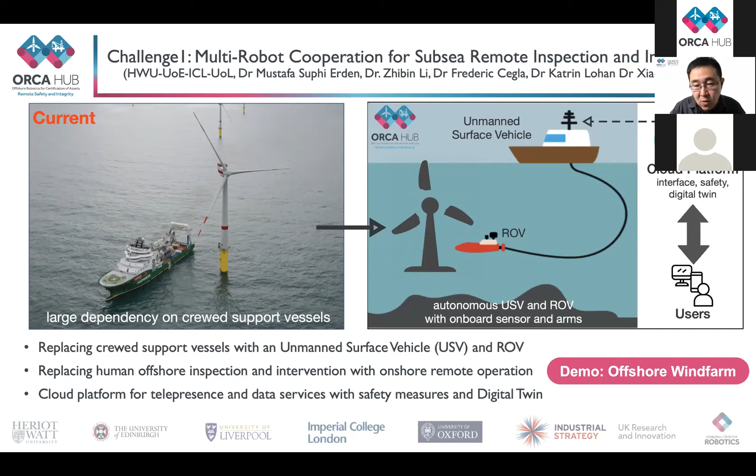So this is the joint challenge with Heriot-Watt University, University of Edinburgh, Imperial College London, and University of Liverpool, with all my colleagues here, working together to push this forward. So eventually, we really want to demonstrate this challenge in the offshore wind farm as a use case.

So we identified 4 main technologies we think are really important, as the pillars to eventually support this Challenge 1. So the first one is the coordination of the unmanned surface vessel and ROV.

So I think I want to quickly review what we can achieve now. Some of you are probably quite familiar if you joined the 17th information session, but let's just quickly understand what we can do and what we are missing.

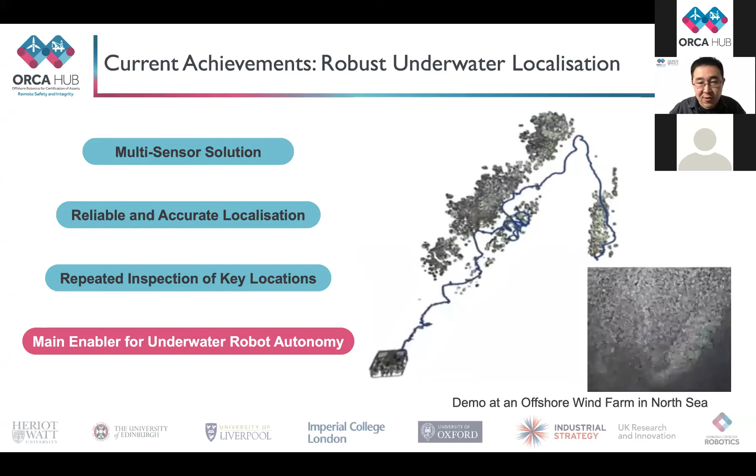So what we can do now is we can quite reliably localize our robots or underwater vehicle using different sensor fusion solutions. And based on that, we can repeatedly ask the ROV to go back to the key locations to do the inspection.

So based on the localization and this planning capability, we can have a design trajectory. If we know roughly what the environment looks like, we can ask the vehicle to follow and autonomously navigate around while doing all the inspection or other operation work.

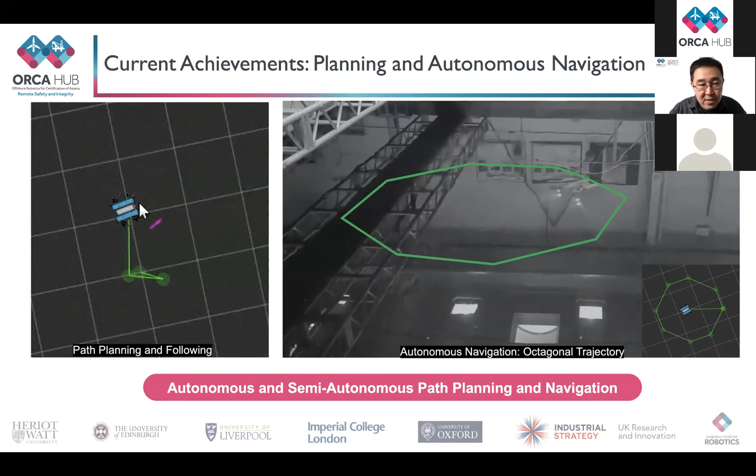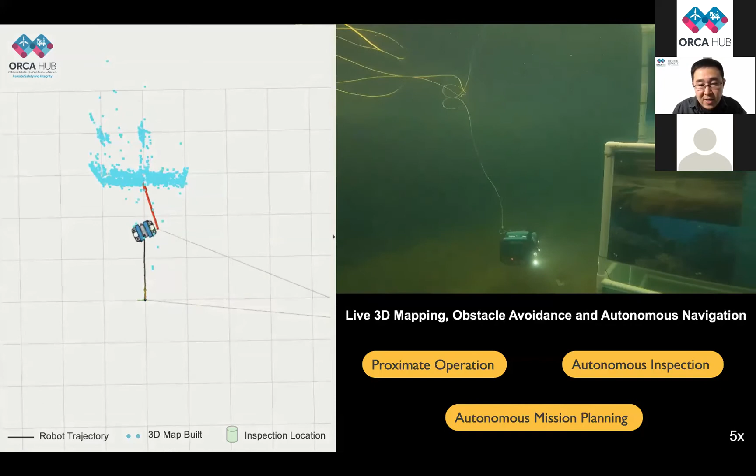So this is one of the videos showing work quite related to all this localization, planning, and autonomous navigation for autonomous underwater inspection, especially for relatively close range inspection.

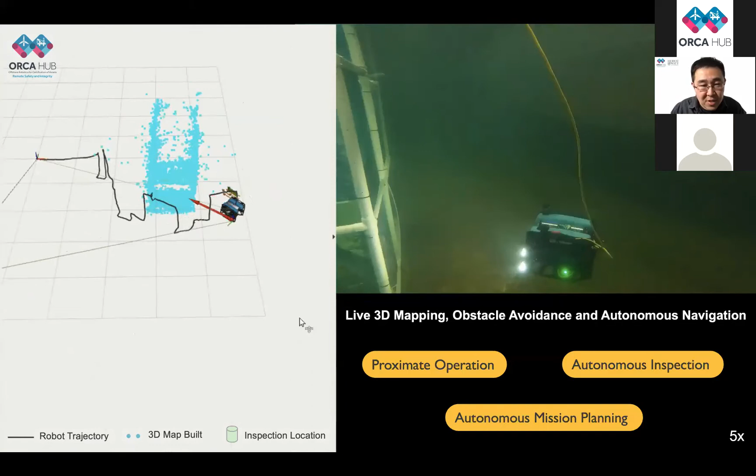So we have the vehicle dropped in the water, the vehicle autonomously searching for the target, and using all the onboard sensors to build a map, meanwhile avoiding all obstacles, and also doing the inspection in terms of collecting high resolution images and building a 3D map of the environment.

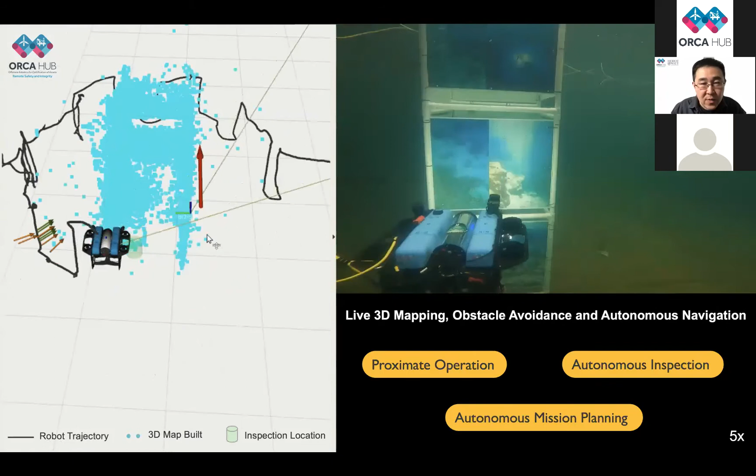So once finished with all this autonomous operation, we come back, we have high resolution data, and we can build a much denser map. This is the robot going and searching the path with the pattern, eventually finishing.

So this is a quick summary of what we can do now. But what's really missing, and what this challenge is going to really look at for the next step.

So the very important one is really cooperative localization and mapping of the USV and ROV, because when they're working together, they need to have a kind of pattern to support each other, with the tether of the ROV connected to the USV, because everything we want to do is pretty much pushing toward autonomous operation.

We also need to really look at real-time obstacle avoidance and planning with the surface vessel working close to the wind turbine in our use case. So we want both the ROV and the USV to have real-time avoidance and planning capabilities.

So the multi-robot collaborative navigation and planning is definitely the main thing to eventually support all the autonomous offshore operation. That's why it's a very big thing.

And the 3D exploration path generation, generating the path when we're doing this inspection, because it's going to be quite a challenging environment when these two come together with the tether management and all the things. We're starting to do this simulation now for this scope, based on our existing capability I showed before.

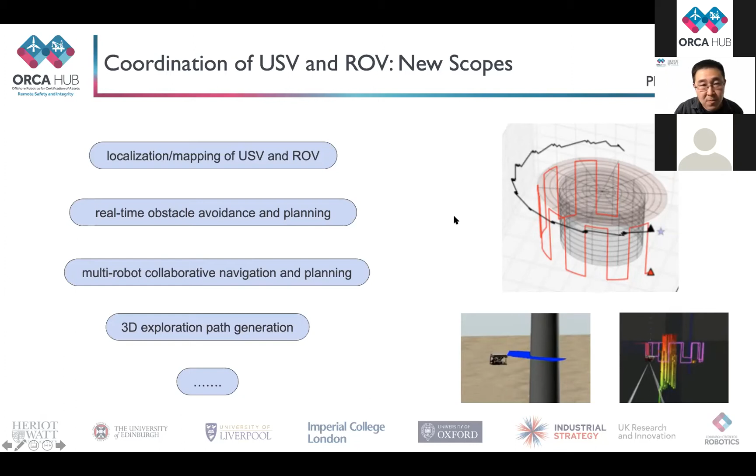So the next quite important technology we think is around one of the use cases, underwater inspection, which we really want to do. So I'm showing some of the current achievements we can do.

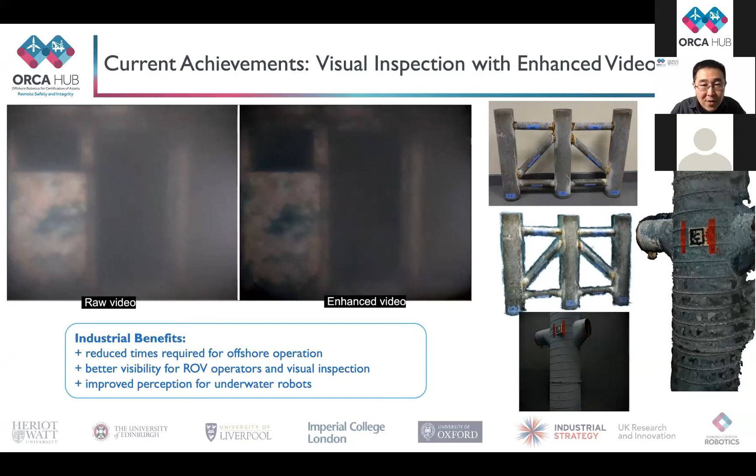So we can use a camera to extract and collect very high resolution images with improved visibility. I'll show you an example on the top left, a video. As an example, we collect data offshore, and you can see much more improved resolution.

This is very interesting for us because this can reduce the time for offshore operation and also improve the visibility for operators. Meanwhile, that means the robot has much more data to see what's around it and also to do mapping and situational awareness.

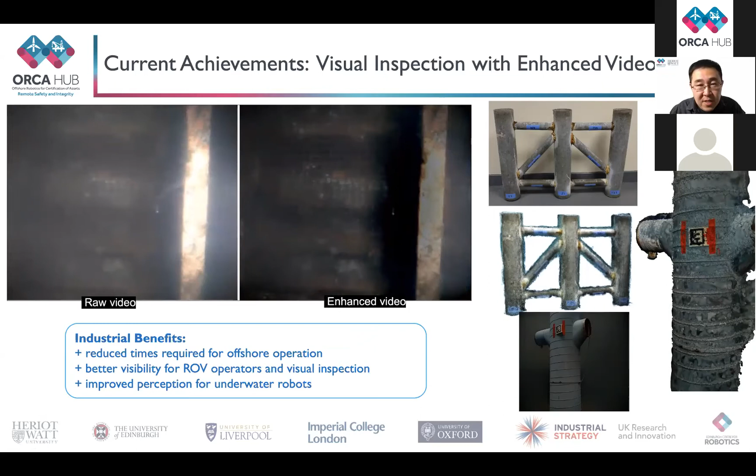So after this, we can really use the current technology to build a dense map of the environment to do the inspection. This is very much based on visual inspection, but for us, the new scope in this challenge and technology around it is still one part: contactless inspection.

So basically using vision, collecting all the videos, high resolution videos, really for the operators, for humans, and also for the machine learning algorithms to understand what's happening for the assets.

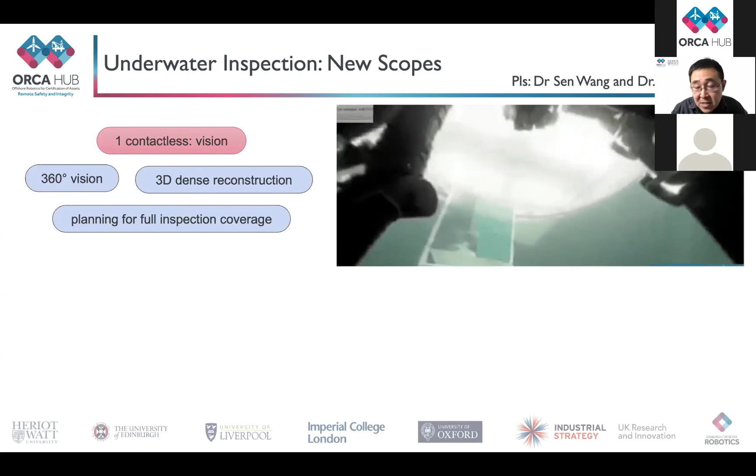A very important thing we explored and are starting to do is using 3D vision and omnidirectional vision. I'll show you a video on the top right. You can see on the vehicle we have a full 360 vision, which gives us a much better wide view of the image. This means when the operator sees the video, or when we're using this to train machine learning or deep learning algorithms, we can have much more data.

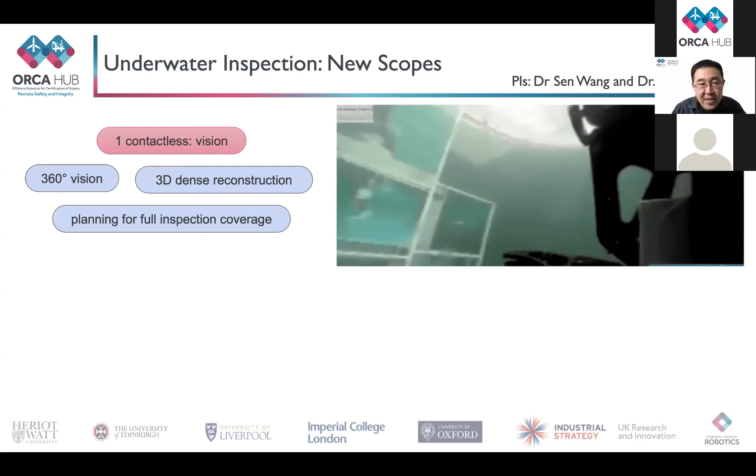So we can still continue doing the 3D inspection, right? We can build a 3D dense map and measure the dimensions. One of the very important parts here for the underwater inspection is really doing a planning algorithm to ensure full inspection coverage, which means once we go for one job, we really want to cover everywhere we're interested in.

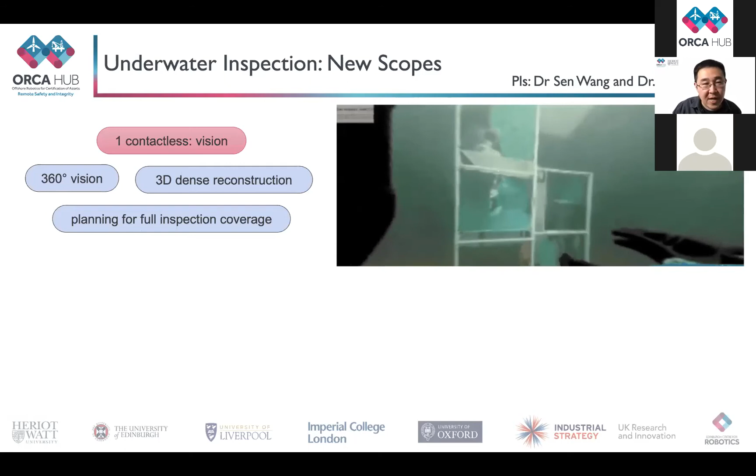We want to do inspection, but this is going to be autonomous systems, and we need to have a full understanding of where we covered and where we haven't covered for the underwater inspection. This is going to be planning algorithms coupled with the previous ones I showed.

The next part is more like contact inspection, especially doing non-destructive testing. We have a collaboration work, and Fred from Imperial is leading the work to design and manufacture this marinized EMAT sensor.

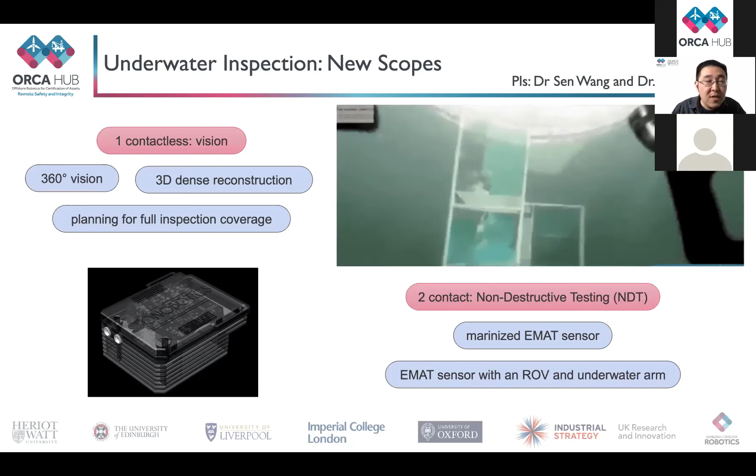Electromagnetic acoustic transducer sensor. We can use these sensors, eventually deploy and test our ROV and underwater arm, using this for NDE inspection. So these are the two new scopes we really want to focus on in underwater inspection technologies.

The next one is more focused on underwater intervention. Currently, what we can do is use our system to stabilize the interaction with a physical structure, especially when we're facing disturbance, for example random current, so we can stabilize our vehicle and use the robot arm to make contact with the asset.

We can also optimize the vehicle location for maximum manipulability and force transmission. We had a demonstration back in Blyth for the ORCA project.

We had a vehicle dropped in the big tank, and we could send the vehicle's position and pose through 4G. Then we had a robotic arm and a Stewart platform in our lab in Edinburgh to simulate this motion and do the inspection for the pipe.

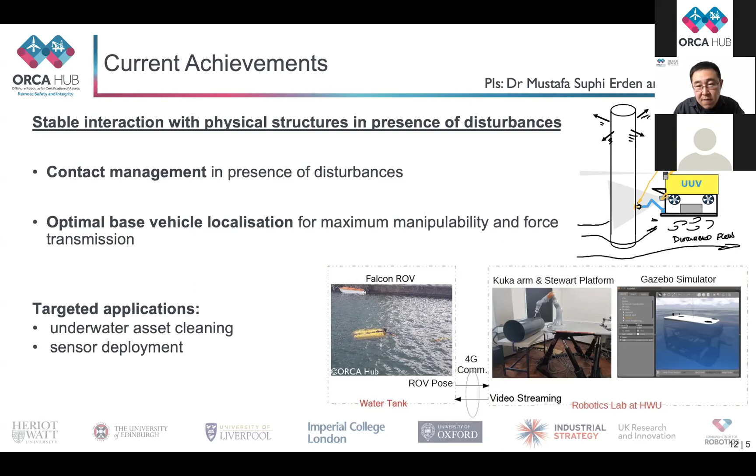We also have a simulator which can link as hardware in the loop to do this application. What we really target and want to demo first is underwater asset cleaning, biofouling cleaning, and the other is sensor deployment combined with the EMAT sensor for NDT.

The new scope of what we really want to do in underwater intervention is very much around contact-aware remote manipulation. We think contact awareness is really important, especially looking at the challenge we're facing, since everything is going to be remote.

We're going to have the vehicle, the vessel, and the manipulator on the vehicle working remotely offshore, and we send all this information to the cloud where the operator can interact. That means for the operator, we really want a way to have a feeling, especially when doing the contact operation.

That's why we want to look at haptic feedback based tele-manipulation, which means the operator with haptic devices can feel the force when the manipulator contacts the structure. So remotely, you have a feeling of what force is applied there, which ensures safety for the interaction with the asset.

We also have vehicle manipulation control with time delay and disturbance, because this is really key when doing remote operation, since everything will be remotely operated. The time delay will definitely be there, and there's also disturbance, so we need the vehicle to handle all these challenges.

And the next is really underwater operation using the underwater arm. I'm showing one example here.

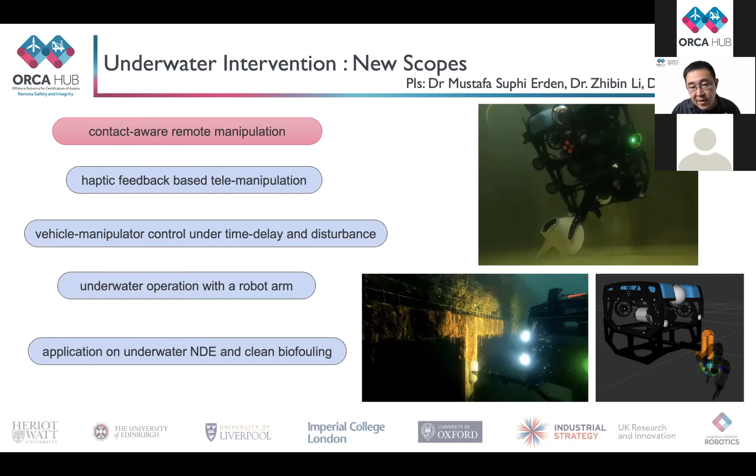So the last one is the cloud and remote operation. What we can do now is stream full resolution 360 video over 4G, internet, or Wi-Fi, pretty much everywhere around the world. We had a recent test with US colleagues - they can operate our vehicle from the US, have full real-time video to understand what's happening, and teleoperate it. We also have a system, based on the previous example I showed, for autonomous inspection using vision and sensor fusion sonar to avoid obstacles.

That means we can have an operator window or operator system on the browser, and the user can just select a high-level command to choose where to do the inspection, with the full video, the map, and also the vehicle location shown in a browser.

We demonstrated this at a UK festival event a few weeks ago, with many users connected around the UK. That means we have the capability to deploy these systems on a cloud platform using 4G, Wi-Fi, or other internet. It's device and platform agnostic, because people can use different phones or laptops, since it's based on the browser, to operate and understand what the robot is doing.

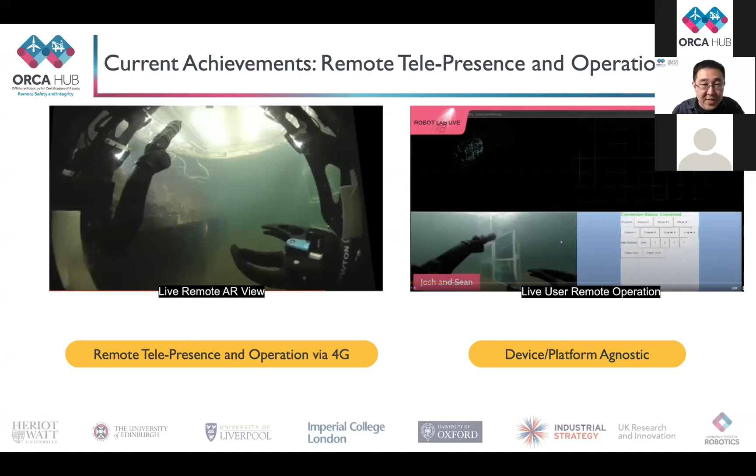What we really want to extend, based on this technology for cloud and remote operation, is to give the user a full understanding of what's happening on the remote side - when the robot is working on site and the user is in the offshore office, what's really happening there.

One very important thing for the manipulator is really having a haptics understanding. One of the things we're going to have is tactile sensing with gloves, so a remote user can really understand what the vehicle is doing when it has contact.

We're also going to have cloud data learning and deploy machine learning models, training them as a whole pipeline on the cloud server. Another very important thing, we're going to have a digital twin for user interaction, visualization, and real data representation.

Safety, we think, is really crucial when doing this work. That's why we have Dr. Xiaowei Huang from University of Liverpool leading the work, doing all the safety verification of this technology. We're going to design safety measures for edge robot autonomy, meaning on the local robot system we'll have safety measures there, and also a safety measure designed on the cloud system - it's kind of a 2-layer system.

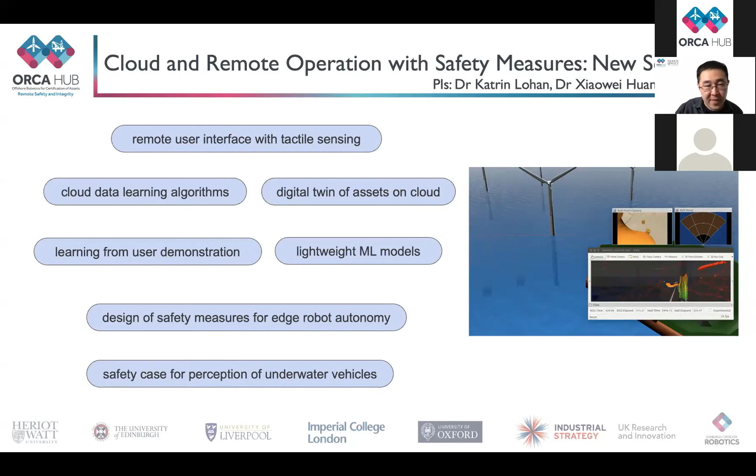We're also going to do a safety case for the perception of underwater vehicles, especially when doing autonomous inspection, where we'll formalize and build this safety argument and cases. So this is the review of the 4 main technology areas we're going to develop, with a quick review of what we can do now.

I want to really highlight what the challenge 1 demo is going to look like. We're going to focus on use cases around offshore wind farms - this is the challenge 1 we're going to target. We're not limited to that because the technology is very general; we can definitely use it for offshore oil, gas, and other sectors. But for demonstration purposes, we're going to focus on offshore wind farm.

Around the inspection, we really want to have the USV and ROV for autonomous underwater inspection of offshore wind turbines. We really want this to be demonstrated offshore, eventually before the end of the ORCA extension period.

The next step is using the EMAT sensor we built in ORCA and testing that on the ROV for underwater NDT. This will probably happen in the tank, but if we have support from industry, we really want to push that also to offshore.

In terms of intervention, we have 3 sub-demos. One is EMAT sensor placement, scanning, and removal from the actual surface, which is linked with inspection. The next is biofouling cleaning using underwater assets, because cleaning is quite important many times before doing NDT.

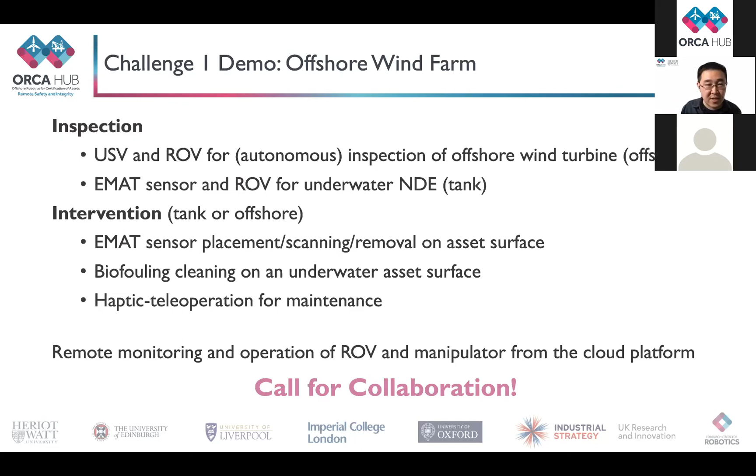This is the connection between all these five use cases. We really invite all the industrial partners and you guys to join us, express interest, and see how we can collaborate together to eventually demonstrate this technology. I hope this can be embedded in your use cases to help solve some current challenges using robotics and AI. That's me, and this is the team for challenge 1. Thank you.

Thank you very much, Sen, very interesting. If I could just ask you to stop sharing your screen. We've had a couple of questions in the chat, which is fantastic. The first one relates to you talking about the EMAT sensor: how is the energy consumption of the EMAT equipment for ROV?

I think the current sensor, which Fred and colleagues developed, has a battery pack roughly this size, and it can last for 2 hours. If we connect it with the ROV, the power will come directly from the ROV, so we don't think power is going to be a direct issue.

Perfect, thank you, hopefully that answers your question. If you have any follow-on questions related to that, please put it into the chat. There's also been a couple of questions related to haptic sensing, Sen. First, what is haptic operation? And what haptic sensor do you plan to be using?

This is a very interesting question because haptics is something we haven't really used a lot in the previous ORCA work, but we gradually realized it's important for remote operation, because much of the work we do was not remote. By haptics, we mean eventually the operator has a device at home or in the office, so when the arm has contact interaction with the structure, the force on the arm or joints feeds back to the user interface.